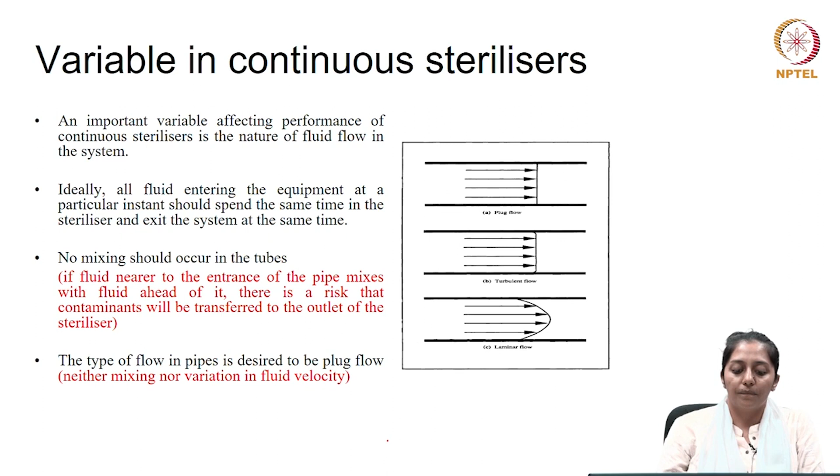One important variable which may affect the performance of continuous sterilizers is the nature of the fluid flow in the system, as it has to go through the section for the holding period at sterilization temperature. Ideally, all fluid entering the equipment at a particular instant should spend the same time in the sterilizer and exit at the same time, which would be plug flow, with no mixing in the tubes. If fluid near the entrance mixes with fluid ahead of it, there is back mixing, and there will be a risk that contaminants are transferred to the outlet. So the type of flow desired is plug flow, where there is neither mixing nor variation in fluid velocity.

We know that plug flow is an ideal flow pattern. In reality, the fluid elements in a pipe have a range of different velocities, and flow tends to be faster through the center of the tube than near the walls. However, plug flow is approached in pipes at turbulence, at Reynolds numbers above 2 into 10 to the power of 4. Operation at such high Reynolds numbers can minimize fluid mixing and velocity variations.

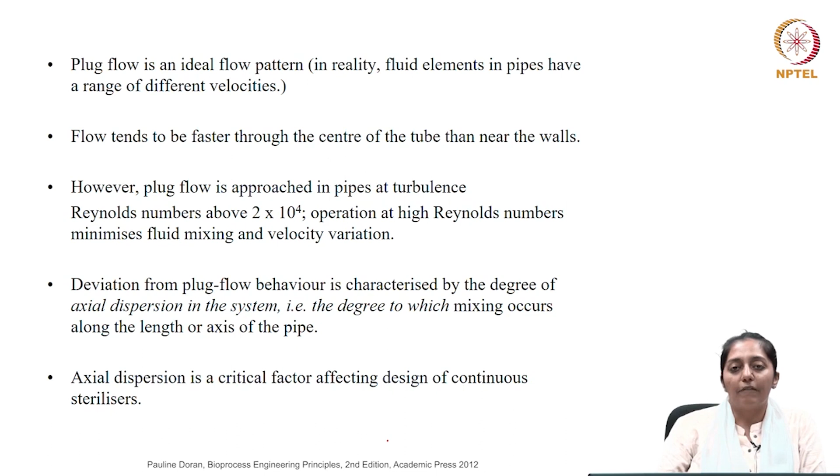So deviation from plug flow behavior is characterized by the degree of axial dispersion in the system. To characterize the non-ideal behavior of fluid flow, we must be able to characterize the degree of axial dispersion in the system, that is, the degree to which mixing is occurring along the length or axis of the pipe. This axial dispersion therefore becomes a critical factor affecting the design of the continuous sterilizer.

In order to find the relative effect of axial dispersion in this process, we use a parameter called the Peclet number, which talks about the relative importance of axial dispersion and bulk flow motion during the transfer of material through the pipe. The Peclet number is given as U times L divided by the dispersion coefficient, where U stands for the average fluid velocity, L stands for the length of the pipe or holding section, and the denominator is the axial dispersion coefficient.

For perfect plug flow, the dispersion is 0, so the Peclet number would be infinitely high. In practical situations, Peclet numbers are found to vary over a big range, from very small singular values like 3 to 600. The value of the dispersion coefficient for a particular system further depends on the Reynolds number and the pipe geometry. Here, for example, a plot is given between the Peclet number and Reynolds number, showing how the Peclet number changes with fluid flow for different geometries, like straight pipes, pipes with bends, artificially roughened pipes, or curved pipes.

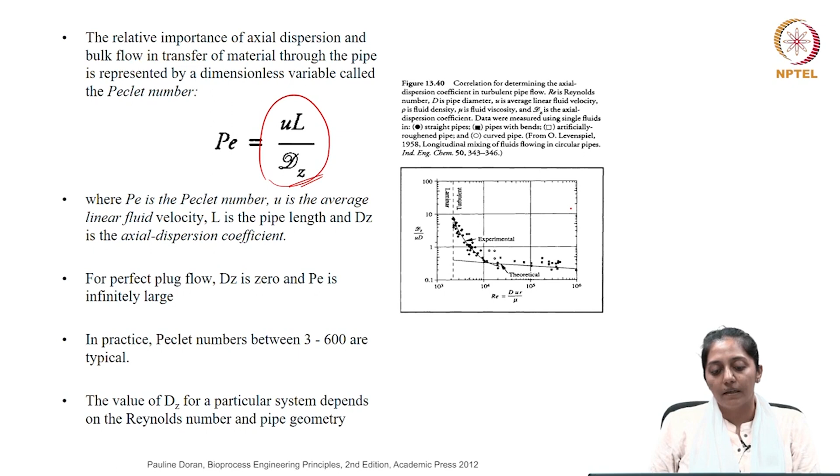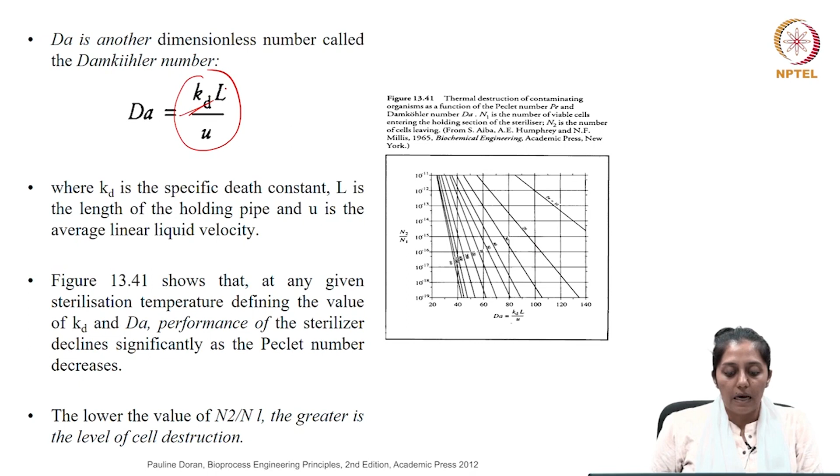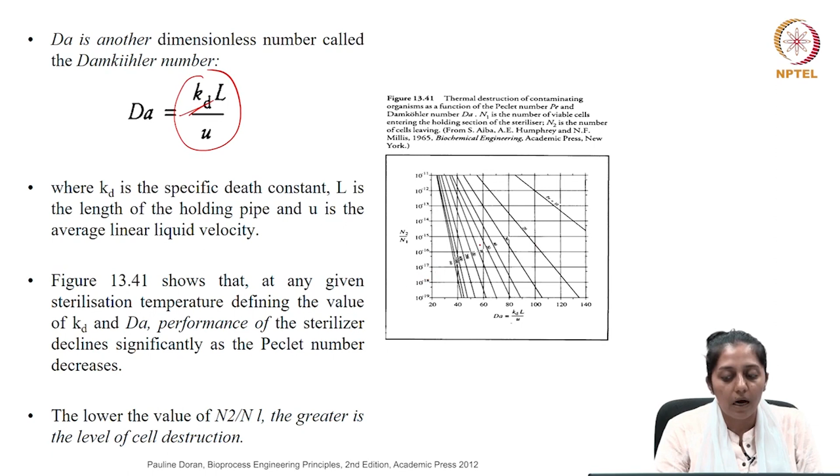This figure shows that at any given sterilization temperature, which defines the Damkohler number, the performance of the sterilizer declines significantly as the Peclet number decreases. The ratio N2 by N1 goes up as the Peclet number decreases, and a decreasing Peclet number means higher axial dispersion. At a given sterilization temperature, which defines the Damkohler number since Kd is a function of temperature, given the length of the holding section and the linear liquid velocity, N2 by N1 will be lower, meaning better sterilization and greater cell destruction, with higher Peclet numbers meaning lesser axial dispersion.

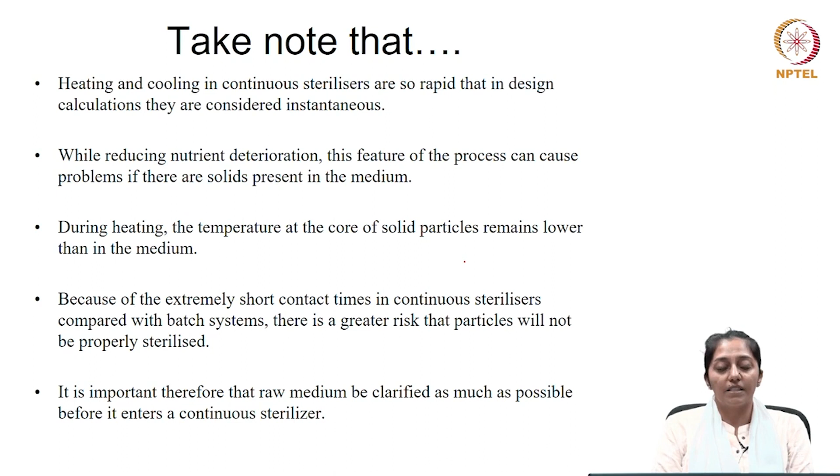What is to be noted is that heating and cooling in continuous sterilizers are so rapid that in design calculations they are considered instantaneous. While this reduces nutrient deterioration, it can cause problems if there are solids present in the medium, since during heating the temperature at the core of the solid particles remains lower than in the medium. Because of the extremely short contact times in continuous sterilizers compared with batch systems, there is a greater risk that these particles, if present, will not be properly sterilized. So it is important that the raw medium is clarified as much as possible from such particles before it enters the continuous sterilizer.

So now let us talk about how filter sterilization is used; we have been talking about steam sterilization.

Media containing heat labile components such as enzymes or serum can be easily destroyed by heat and therefore must be sterilized by other means. Typically, membranes are used for filter sterilization of liquids, sometimes made of cellulose esters or other polymers. They have pores between 0.2 to 0.45 microns in diameter depending on the use.

The membranes themselves must be sterilized before use, and sometimes they are one-time use membranes. As medium is passed through the filter, the bacteria and other particles with dimensions greater than the pore size will be screened out and collected on the surface of the membrane.

Smaller pore sizes used in liquid filtration mean that the membranes can readily be blocked unless the medium is pre-filtered to remove large particles. So to achieve high flow rates, large surface areas will be required.

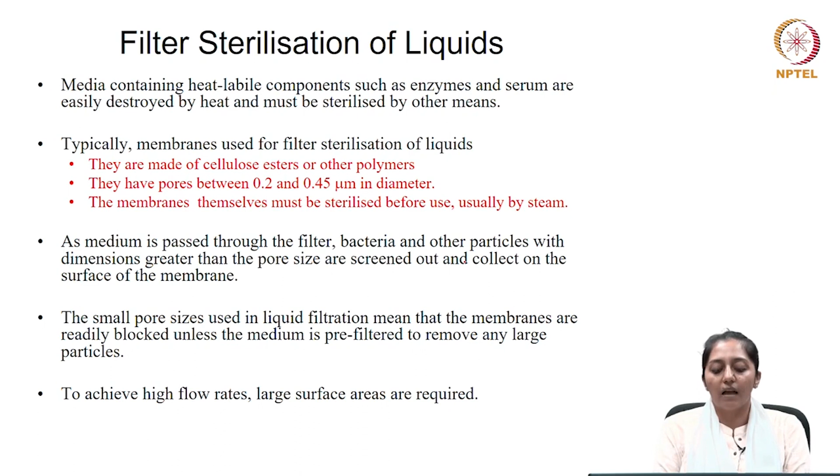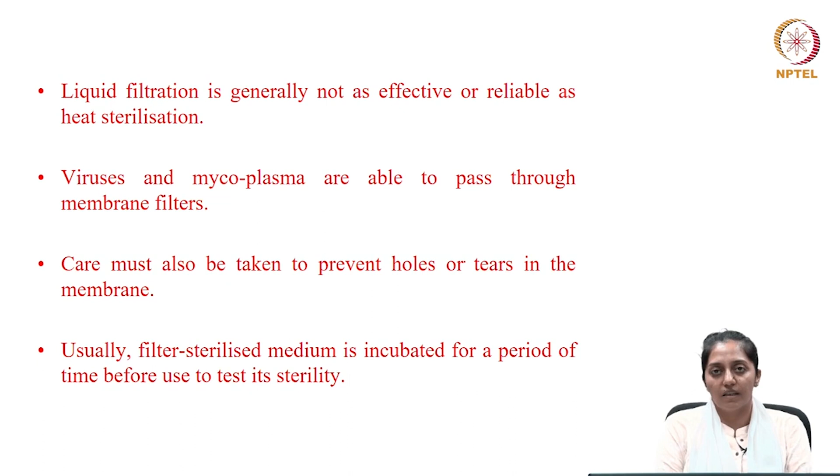Liquid filtration is generally not as effective and reliable as heat sterilization, because viruses or mycoplasmas are able to pass through the membrane filters. Care must also be taken to prevent formations of holes or tears in the membrane due to high pressure. Usually filter sterilized medium is incubated for a period of time before using it in order to test its sterility levels.

So after talking about the filtration of liquid medium or sterile liquid using steam sparging, even the air being sparged in the fermenter must be made sterile to avoid any contamination during the fermentation process.

The number of microbial cells generally present in the air are of the order of 10 to the power of 3 to 10 to the power of 4 per meter cube. Filtration is the most common method for sterilizing air in large scale bioprocesses. Heat sterilization of gases is economically impractical.

So for sterilizing air, generally depth filters are used, which consist of compacted beds or pads of fibrous material such as glass wool, widely used in the fermentation industry. The distances between the fibers in depth filters are typically in the range of 2 to 10 microns, about 10 times greater than the dimensions of the bacteria or spores which need to be removed.

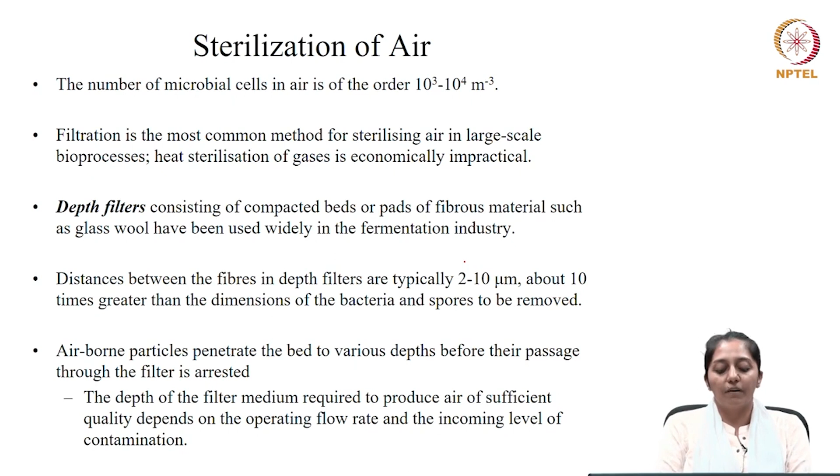It's very interesting that this kind of setup is used to get rid of much smaller size bacteria present in the air. Airborne particles penetrate the bed to various depths before their passage through the filter is arrested. The depth of the filter medium required to produce air of sufficient quality depends on the operating flow rate and the incoming level of contaminants.

Cells get collected in depth filters by a combination of processes including impaction, interception, electrostatic effects for particles smaller than 1 micron, and diffusion to the fibers.

Depth filters do not perform well if there are large fluctuations in the flow rate or if the air is humid or wet. Liquid condensing in the filter will increase the pressure drop, causing channeling of the gas flow and provide a path for organisms to escape or grow in the bed.

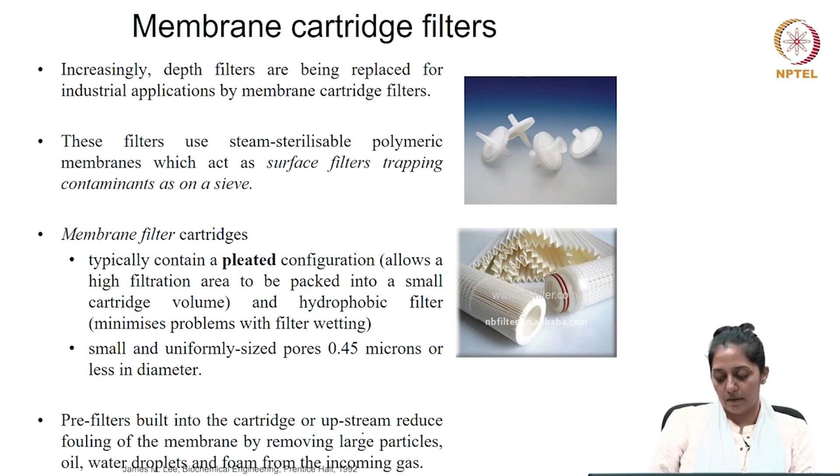Filters are also used to sterilize the effluent gases leaving the fermenters. Apart from the sterile air being sparged in, there is a continuous outlet of air from the headspace to release pressure. That effluent gas is also sterilized, passing through these filters before it moves out of the fermenter. The objective is to prevent release into the atmosphere of any microorganisms entrained in the aerosols through the headspace of the reactor.

The concentration of cells in the fermenter gas is several times greater than in the air coming in. So containment becomes particularly important when organisms used in fermentation are potentially harmful to the human personnel working or the environment. Companies operating fermentations with pathogenic or recombinant strains are required by the regulatory authorities to prevent the escape of these cells.

So, if we need to characterize the efficiency of the air filtration process, we must first see how the three processes impact the removal of the organisms.

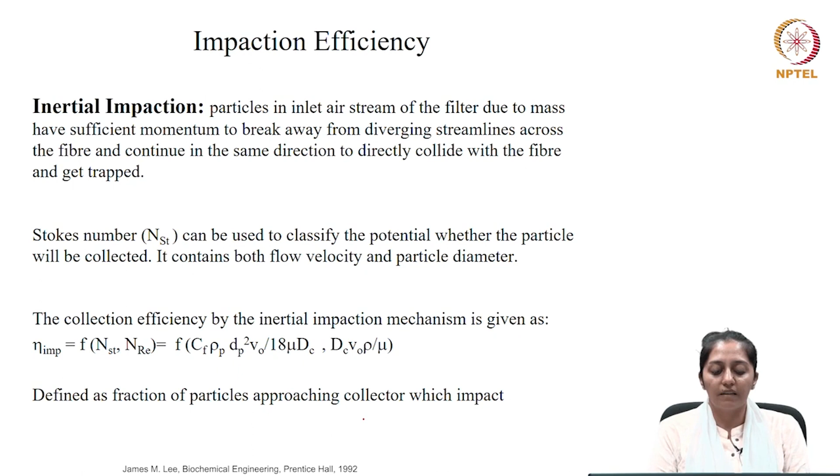So, the collection efficiency by the inertial impaction mechanism is given as a function of the Stokes number and Reynolds number. Efficiency would increase with increasing particle diameter and airflow velocity.

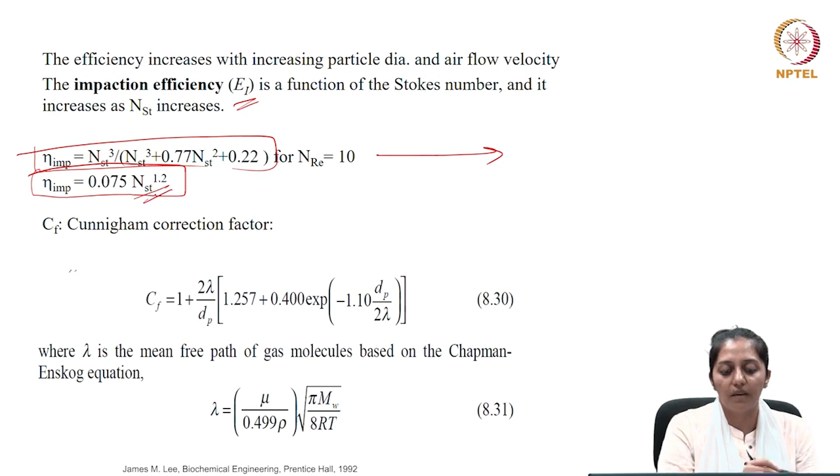So, impaction efficiency, defined as EI, is a function of Stokes number and increases as the Stokes number increases. For Reynolds number equal to 10, an empirical relationship for the inertial impaction efficiency is given in terms of Stokes number, and for other than 10, the efficiency of impaction is defined by a second empirical equation.

Similarly, if the particle is getting trapped by the interception process, what does that mean? It means particles having big size but less mass will follow the streamline of air as they diverge around the fiber collector. However, they can get trapped if they are close enough to contact the fiber.

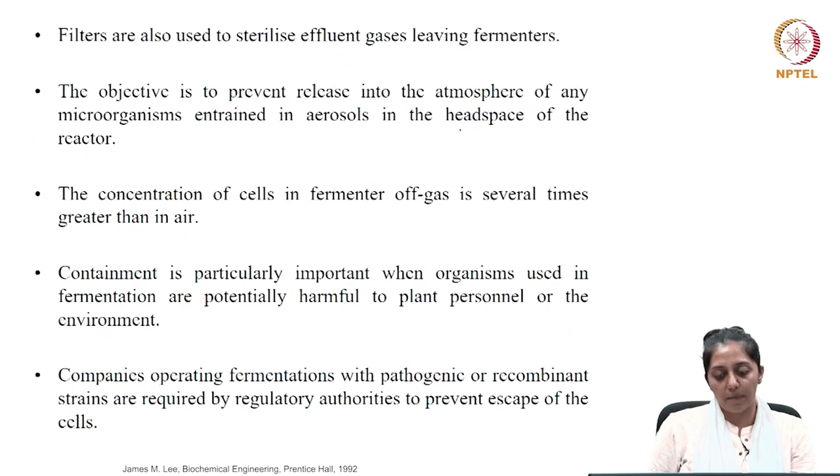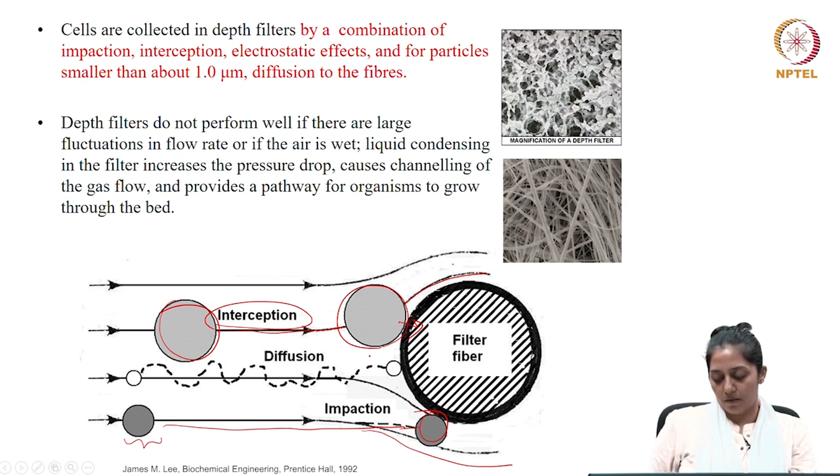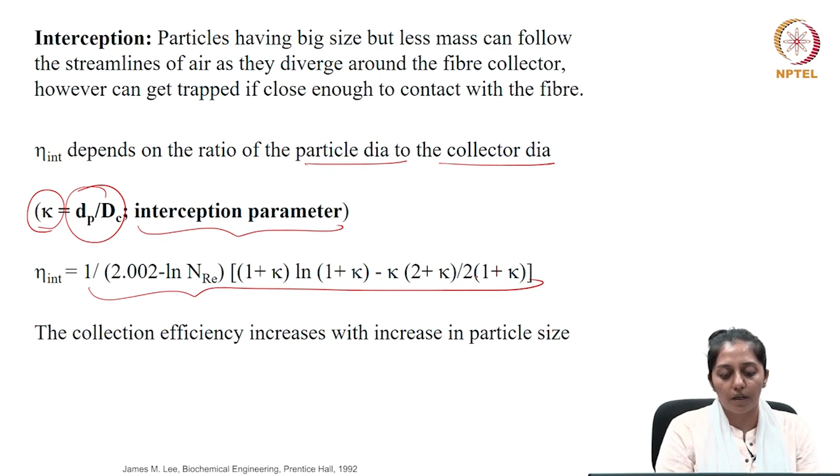So the efficiency of interception would depend on the ratio of the particle diameter to the collector diameter, the fiber diameter. The interception parameter is defined as the ratio of the diameter of the particle to the diameter of the collector, and in turn it can be a function of the Reynolds number and the interception parameter. This is one empirical relationship showing how to define the efficiency due to interception.

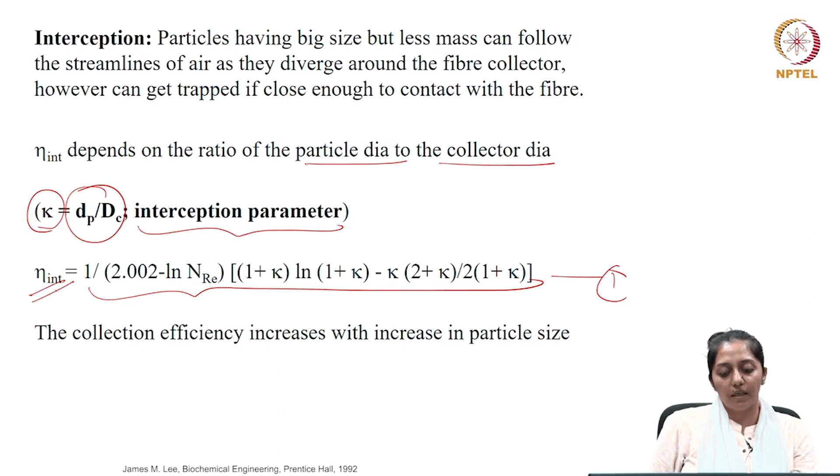Efficiency means the collection efficiency. So, one can make out the collection efficiency would increase with the increase in the particle size.

Now, if the particle size is very small, smaller than 1 micron in diameter, they will exhibit Brownian movement which will be sufficiently intense to produce diffusion. If a streamline containing these particles is sufficiently close to the collector, the particle might hit and get trapped. So the collection efficiency by diffusion will increase with decrease in particle size or the air velocity, the bulk flow.

Here the efficiency due to diffusion has been found to be a function of the Peclet number and the interception parameter. The Peclet number in turn is made a function of the Reynolds number and the Schmidt's number.

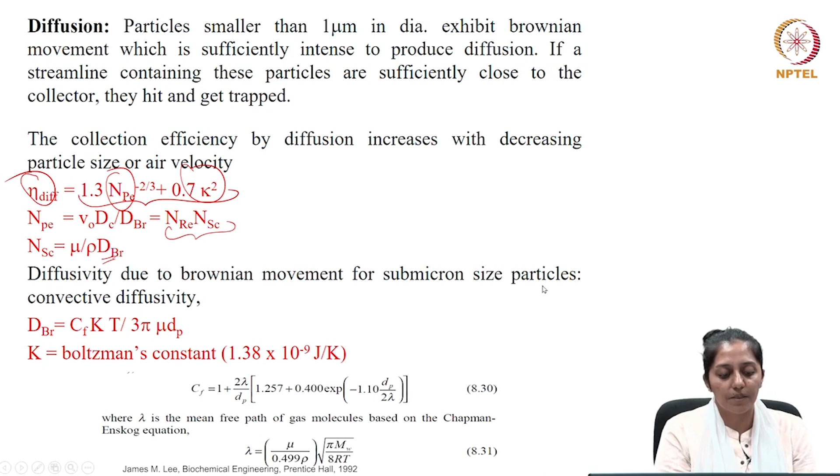The diffusivity due to Brownian movement is dBr for submicron size particles. So you may call it convective diffusivity.

So the efficiency due to diffusion is a function of the Peclet number, defined by an empirical relationship being a function of Peclet number and the interception parameter. The Peclet number in turn is a function of Reynolds number and Schmidt's number.

The Schmidt's number is defined by the convective diffusivity due to Brownian movement, which would depend on the diameter of the particle and the Boltzmann constant, where K in the diffusivity function is the Boltzmann constant, Cf is the correction factor, in turn given by this function shown here.

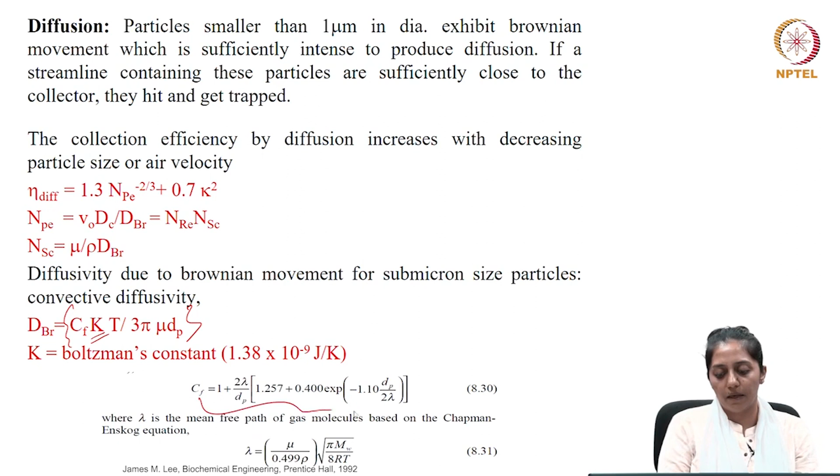Now, if we need to calculate the overall efficiency of impaction, interception or diffusion, the efficiency for collection of the particle by the filter can be obtained if we know the individual efficiencies of impaction, interception and diffusion. So the probability of successfully collecting the particle by one or more of the mechanisms - we first calculate the probability of particles not getting collected by one but getting collected by any other mechanism.

So 1 minus eta IMP would be the probability of not getting collected by impaction. 1 minus eta INT would be the probability of not getting collected by interception. Similarly, 1 minus eta DIF would be the probability of not getting collected by the diffusion process.

And the overall probability of not getting collected by any of these processes will be the multiplication of all these probabilities. And if we reduce this by 1, then it will be the probability of being able to collect by one or more of these mechanisms.

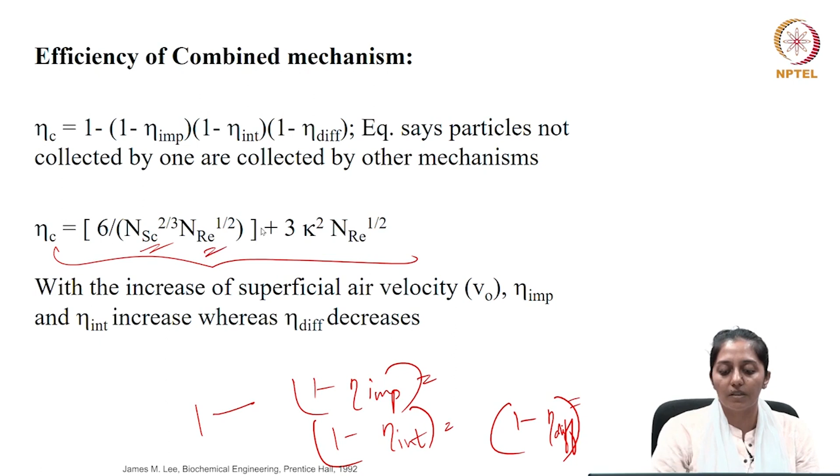So your overall collection efficiency is given by an empirical correlation defined by the Schmidt's number, the Reynolds number and the interception parameter.

So with the increase in the superficial air velocity, the efficiency due to impaction and efficiency due to interception would increase, whereas the efficiency due to diffusion might decrease.